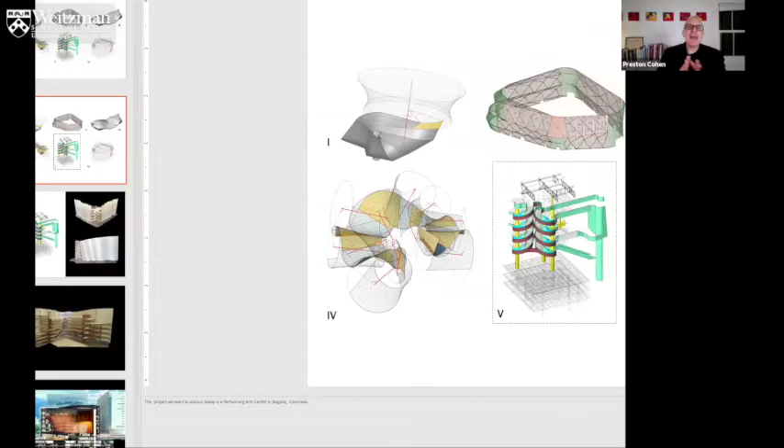The way we like to work is to problematize, as we put it, form in architecture, and in ways that will do very specific things, very specific, exciting things, we hope. Today, we're going to tell a story about hyperboloids. Now, this is part of a much larger story. Many projects have these in our office, but this is specifically geared toward this one project. As Ali, you talked about, this is the Performing Arts Center in Bogota.

We are highlighting here one element in it, which is this extraordinary stair, this double stair. And you will see that what happens with these stairs is that they enliven this building. They make it theatrical even before you enter from the piazza. One for going up, one for coming down, or they are, let's say, the ends of a curtain about to open or shut. There are many possible metaphors, which I actually think are meaningful. They resonate in a way, but it is also just pure geometry.

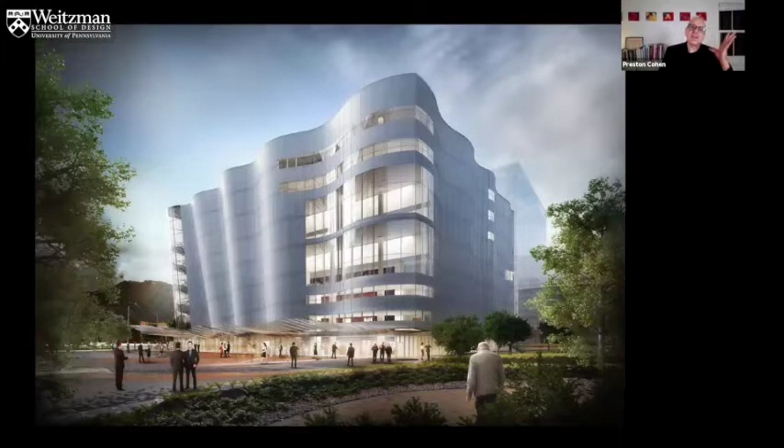If we were to look now at why we did this, we start with this big theater. It's 2,100 seats. And you will see when we show you, we also have a very large black box theater, that in this process of creating this facade, which turns out to undulate, to respond to that corner of the two cylinders, and we'll come back to this, what you will find is that these two stairs have created a sequence for dealing with a very difficult site situation.

Let me tell you about the site. Basically, we have a seriously compressed situation. It's far too small. It was incorrectly planned. It was not anticipated that there would be such a large performing center there. It's right across from this enormous development that OMA have begun, master planned. And as I said, a site too small.

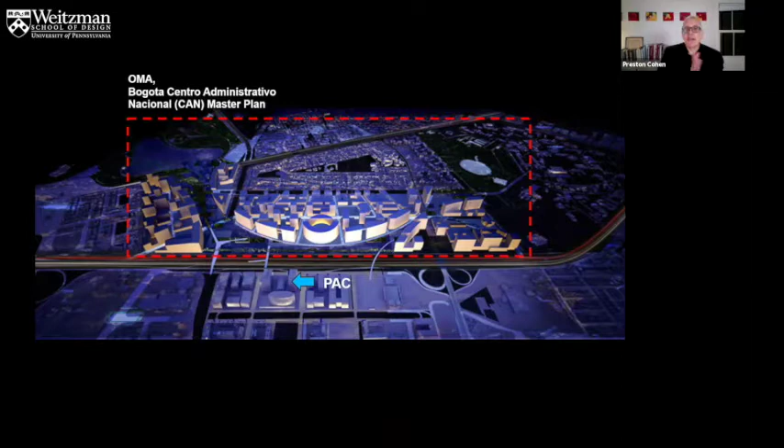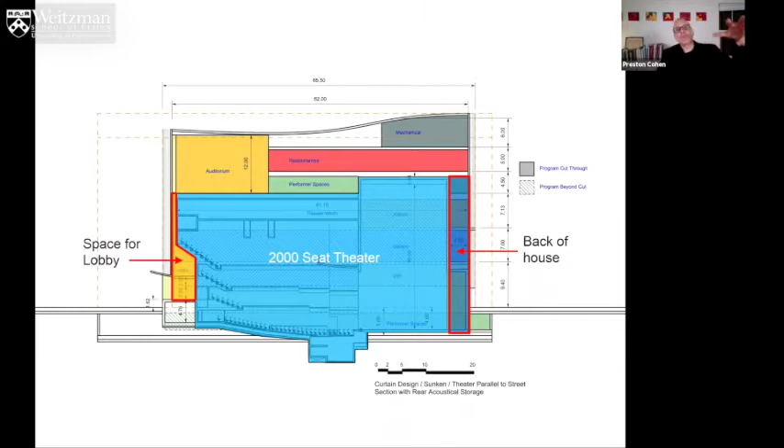So we began. We got this site, and here is this theater, but it really barely fits within the setback, as you can see. And we struggled with this for a long time with consultants; there seemed to be no way to make this work efficiently and to have a reasonable lobby. The lobby was so tight and small. So we thought, why don't we make it a ring? A lobby that's a ring all the way around the theater. This didn't go over well in terms of circulation, in terms of the congregating of crowds. Can't do it.

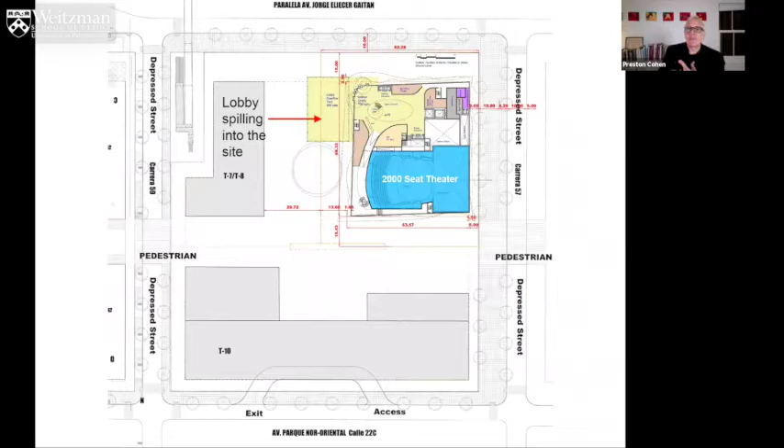Eventually, as you move through this, you will see what happens. We begin to push things up from below the theater to relieve space in the plan. And in this process, we evacuate space for a lobby on the ground level. It's very interesting because as we worked through the project, it kept lifting because more and more of the back of house had to go below the theater. And it was still trying to connect to things that are underground, which was causing a lot of this back of house to kind of violate the theater, to travel through the theater, almost toroidally, Ali, toroidal space. It was passing through and down into another space below. The back of house was for quite some time doing that.

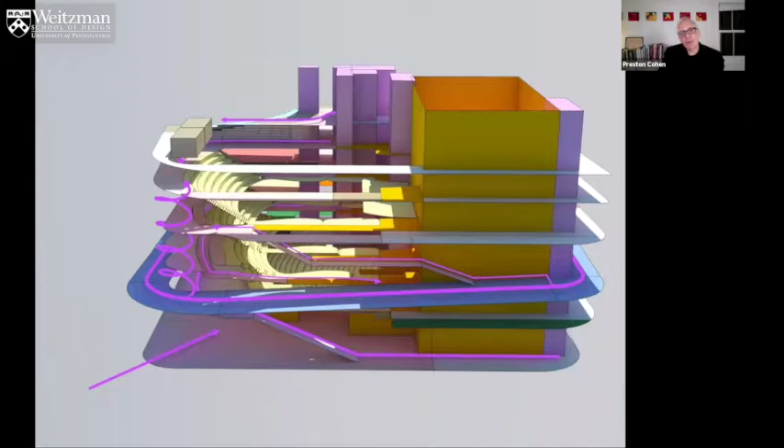Finally, we just lift the whole thing off the ground. We convinced them. It's a long process to arrive at, but eventually the theater is out of the ground entirely. We have an orchestra pit under it, so it's even lifted higher because of that. And it's really up there, and we get a huge lobby. You can see the lobby here in section in the model.

As you rise through, you are going to see that we have a very exciting arrival to the lobby on the level of the seating. And you see the two stairs in the corner there. These two have become a means to kind of create a very dramatic and exciting inward-facing sequence of passage on up into the balcony level and beyond it to these other spaces like the black box up there on the

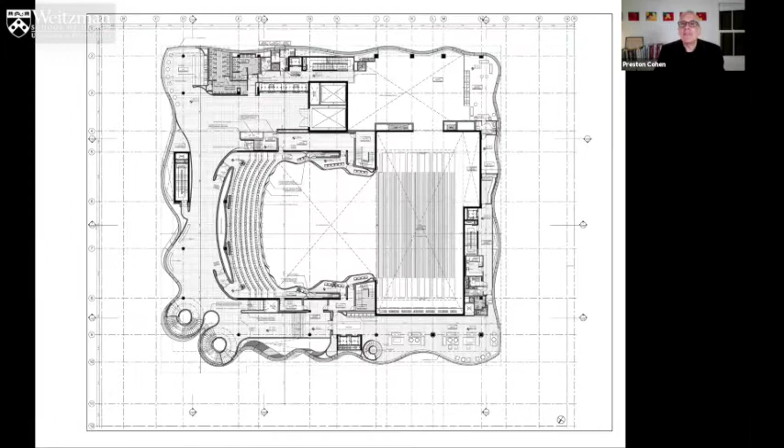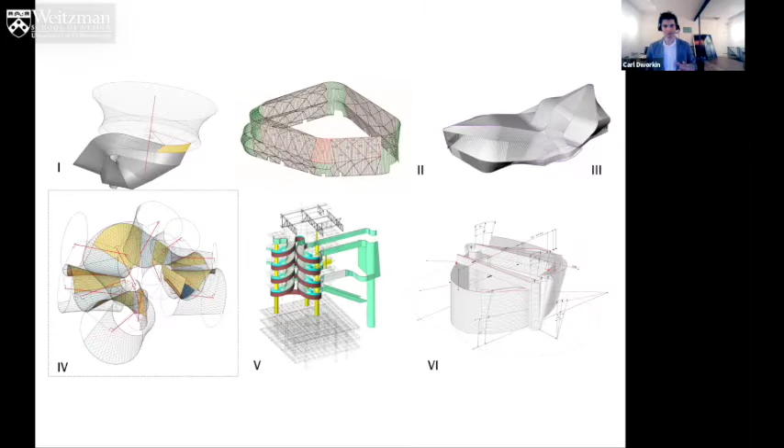Okay, so hello everyone. I want to return briefly to the notion of the 6 projects, and I'm going to start with the basic geometric construction for all of these projects in this narrative that we are working on. And this involves a sequence of hyperboloids strung together tangently, and the surfaces are trimmed to include only a portion of the full hyperboloid. So here you can see the construction sequence of each hyperboloid adding to the next one.

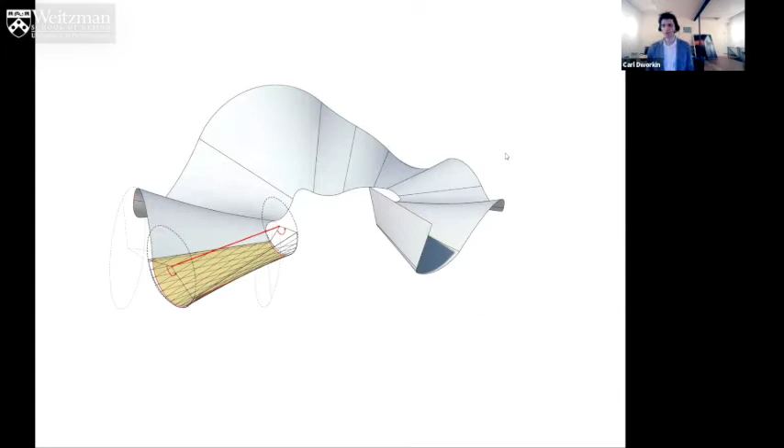And there's a lot of constraint in the way these surfaces link together. And throughout all of our projects, our goal is to produce surface continuity, but also to make manifest that constraint and tension. So to create a tense and taut object where the tension in the geometry is visible and apparent. And we're always asking ourselves whether you can see the tension that was actually within the piecewise continuous stitching of all these surfaces. So here you can see them superimposed on top of each other.

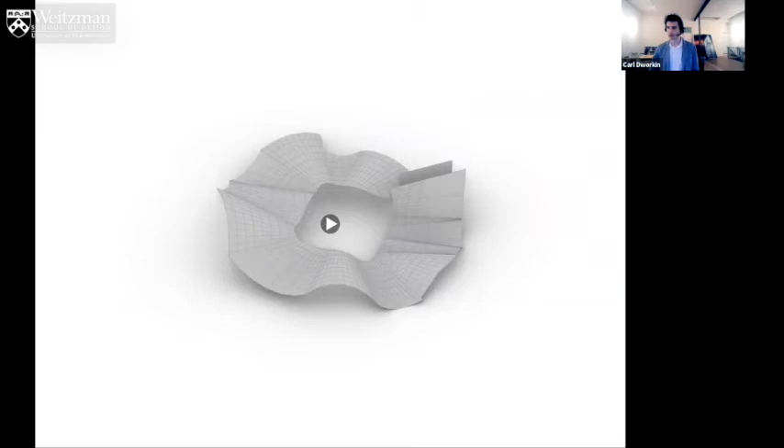So that is the underlying geometry for the facade and for this whole project, and I'm going to explain that in detail. And here in this video, you can see a property of the surface, which is called the skew angle.

Can you see that video, everyone? It's not running. That's too bad. I have to go to the next slide. Okay,

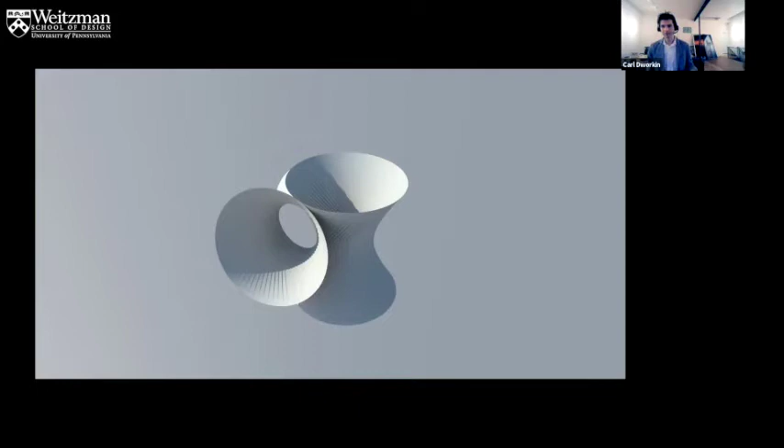And you can change the proportion of these things together. Making the proportion weird is always a good idea. Scott is never content with the straight up proportion. And you can nest multiple ones together so they can share multiple different skew angles. And you can stack them on top of each other, which produces this line there that you can see. And you can try different permutations of that.

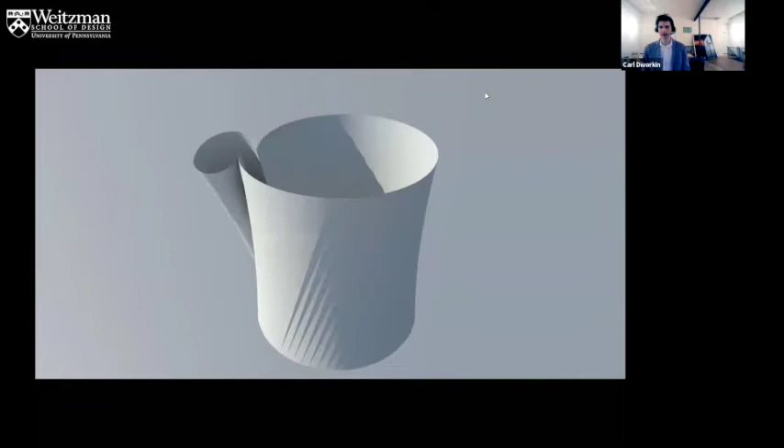So this is a common thing, this particular construction, but what people don't often realize about it is that this line of intersection can be thickened to make a space. So you can add a gap between the two hyperboloids on the line. And this is the moment of innovation for this project, because the implications of this gap are sort of profound. So here you can see various versions of the gap.

And I really hope you can see my video here. You cannot.

Anyway, this is that particular thing. And you can see that actually it's possible to elaborate that gap into an incredibly complicated involuted space. So this is sort of where we tried to go based on that innovation. But actually, we sort of stepped back from that moment and left that for a later exploration.

And we took this particular diagram where you have these two hyperboloids, and this became sort of profound for us because it allowed circulation back and forth between these two halves. And so we thought, what if we could add a stair to this? And so we became interested in putting spiraling stairs of changing radius inside of these two paired hyperboloids.

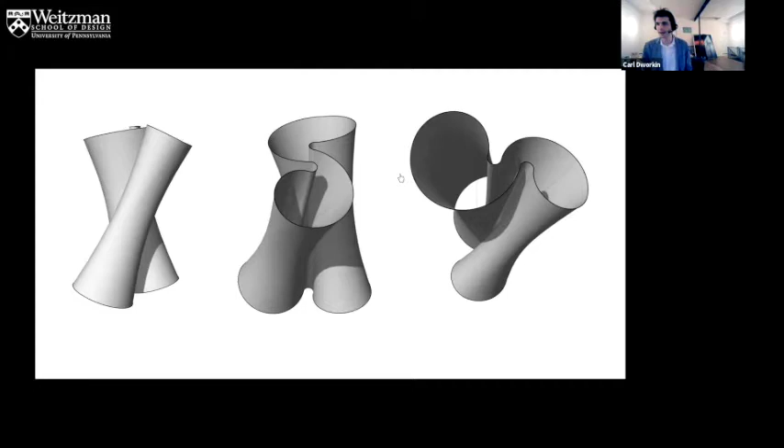So here it is back to the condition without the gap. And here we are adding stairs. You can see this is one volumetrically distinct stair clinging on to another volume that would have a stair within it. And we worked on various versions of this.

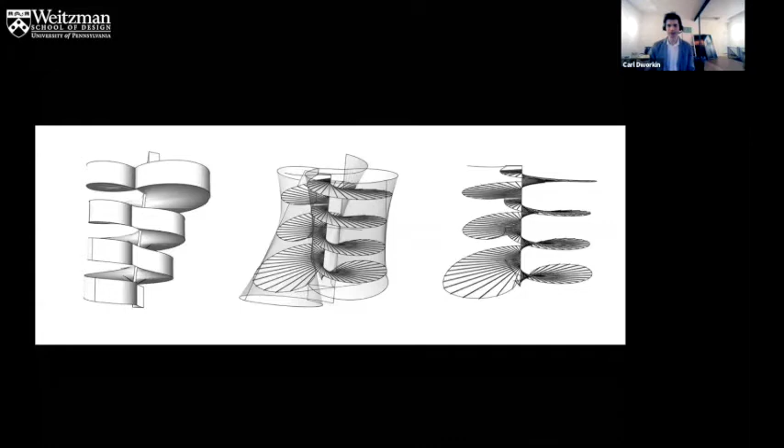And here we are beginning to add the gap back in. The gap makes possible sort of cross-contamination between the stairs. And these are the concept diagrams for this. This is a diagram of a single layer of interweaving, interconnected stairs that are nested inside of two hyperboloids. And the final diagram of that idea. So the gap leads to this.

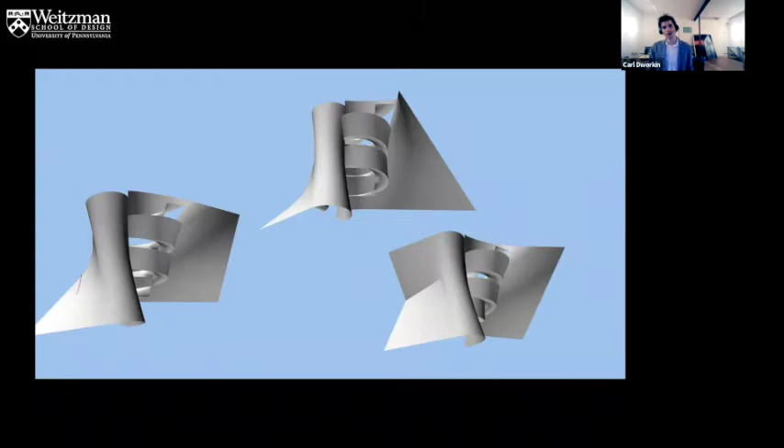And then we started again playing around with changing the proportion, which again is always wonderful. We didn't stop. There are other sort of wilder possibilities. And one of the things that Scott always pushes us on is to try some of these rather than staying on the pure diagrammatic version. And these other versions are less pure, but they're possibly more interesting. And that's something that I've always really valued.

So here's one with a surface with a stair nested inside of it. It's a fascinating direction for a project that we didn't do. Someday that one needs to get done. Yes, it does. We will do it. And here's the inside of that. Look at this one. Here's a stair clinging onto a surface, like a barnacle.

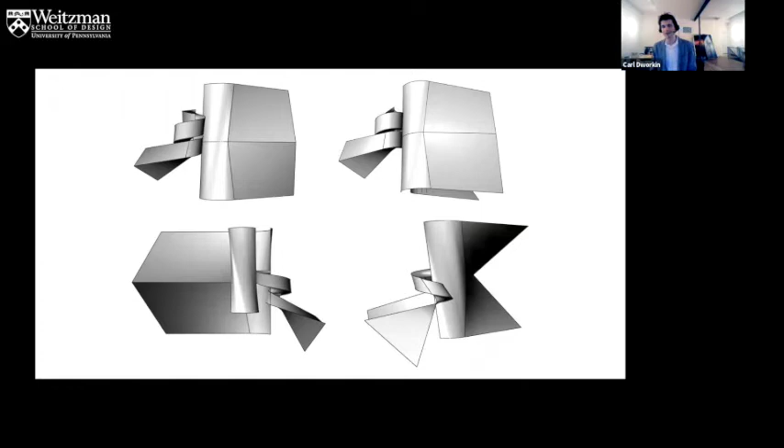And these are, again, other possibilities for projects that we didn't do based on the same underlying idea. This is a tiny stair hanging onto a surface and sort of spewing out and becoming part of the landscape. Here are two stairs wrapped around two interior hyperboloids. It's a stair attached to reeds or straws.

And each one of these nested hyperboloids has a moment of tangency with the others, along a single line. So you can imagine those relationships changing as one grows or shrinks. You can visualize them stirring around. This notion of motion and the fact that something is never stuck is something that Scott has constantly been drilling into us. So I would love to continue with this idea also, Scott. It's a really good one.

And here's one spiraling out from within a surface, becoming part of the surface, merging with it. Here's another one pushing into a surface, a stair falling out of a building, and the possibility of an inside one and an outside one in this nested, implicated dynamic. It's another one. Let me just say one thing about the stair, Carl.

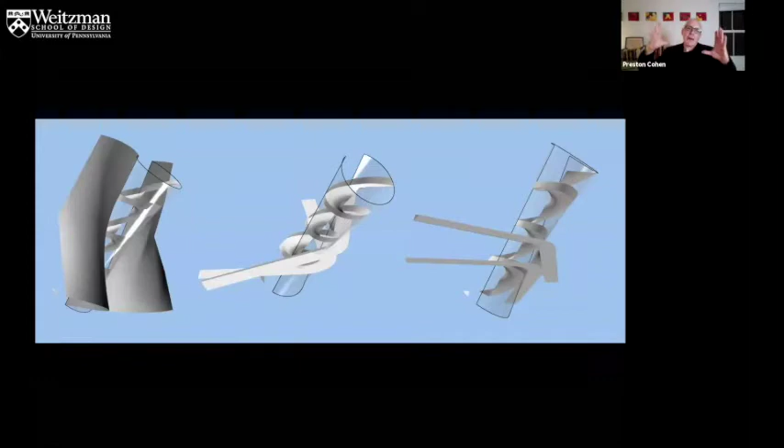Go for it. The goal from the beginning was to deal with this problem of the building that's too full of the theater. The theater was absolutely filling it, and there was a very, very limited area for a lobby adjacent to it. It would have to be the second lobby, not the one below the theater. So when you move up into the building to actually prepare to enter the theater itself, this becomes one of the most important aspects of the whole experience. The Stair of Garnier in Paris is absolutely profoundly the most important part of the theater. So this stair is the realization of an effort to make an extraordinary experience moving up through it.

Now, why is it in this contorted form? It is relieved toward the bottom, owing to the way the theater operates in section, and so it's tightening as it moves up. But we also wanted to have people experience, while moving in it, the fact that sectionally the building is, let's say, not simply an extrusion. Theaters don't extrude as other normal buildings do. As you know, they're very sculpted forms.

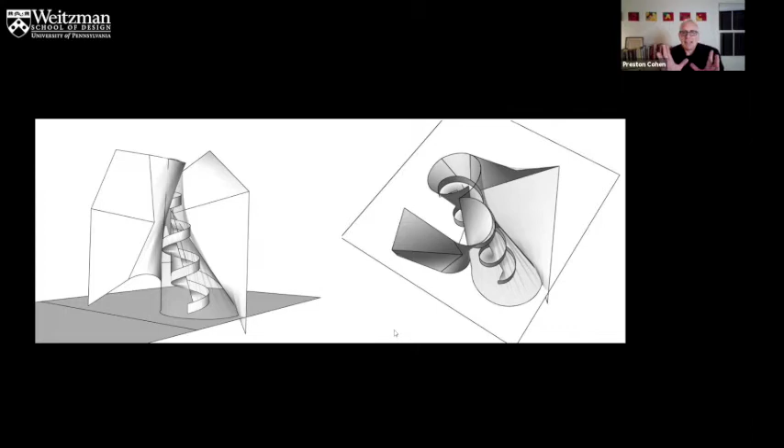And this facade is both trying to address itself to the plaza, present this drama of the stair, and have the stair be experienced inside in such a way that you're aware of the movement of the form of the building. Now, the idea of it being a tight duality, two things so tightly bound together, was somehow the beginning and the end of the story.

The curtain that wraps around the whole building and shuts or opens here, this is the point of commencement and conclusion to the whole building. That ending, that beginning, the stair up, the stair back down. This duality seemed absolutely essential to us. So it's all of those things. A duality, an expression of all these pressures. You see what I'm trying to say, and we want to do it in a very, very geometrically disciplined way to express all of that. It's very hard to make a stair happen in these hyperboloids this way.

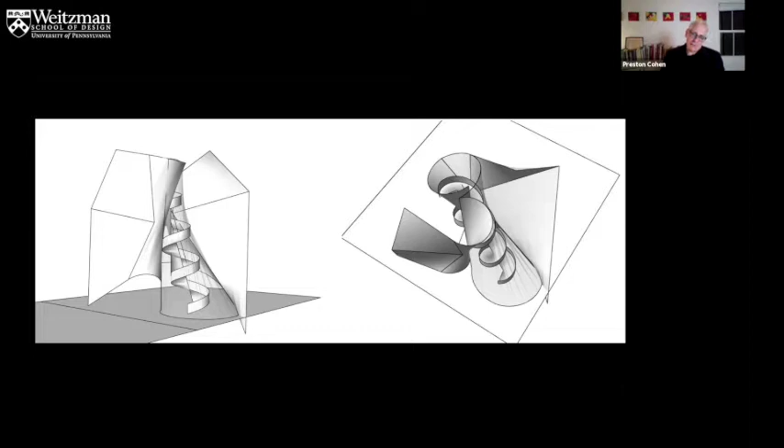Yeah, that helps to explain why, because otherwise we're just talking about tilted stairs. How do we get there? Explain what our main motive was, what we were desirous of. Why do we do it at all? Yeah, what we were desirous of.

And in each project, there are these kinds of desires, these kinds of needs for certain things to happen formally, we feel. So we also had been exploring tilted stairs in some of our other projects, which you can see here. So we had this sort of trajectory we were working on. And the idea of a tilted stair is actually kind of hard to realize, as Scott was saying, because in order to be code, you can't have a migrating spiral stair with changing radiuses.

Each segment of the stair has to be a true spiral for its height, like a series of cylinders nested that shift within a larger shape. And I wish you could see my animation because it makes it clear, but each one of these cylinders will shift off of each other, and the error, the flex between the spiral, is taken up in the landing.

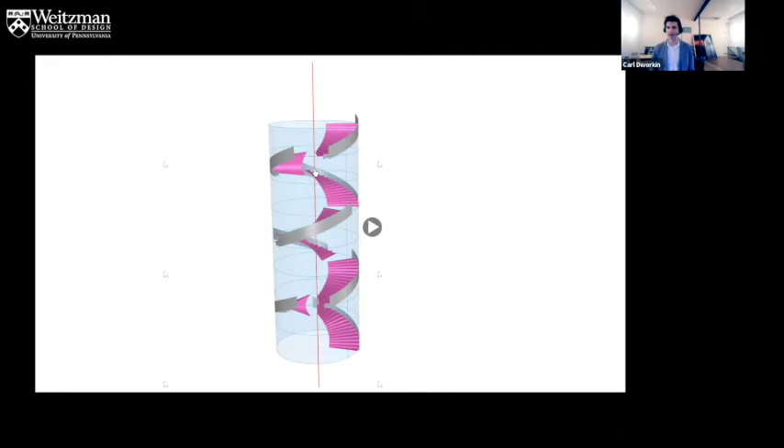And then what we do is we add a smoothing step where these railings tie together the buffer. And you can see we have extra space in the stair so that the path that you walk on is a circle. And then when you get to the landing, there's enough space for you to shift. And overall, they produce something tilted. So here's the diagram of that shifting sequence of stairs.

So yeah, the stair is broken into these pieces in order to conform; it can't smoothly occupy this tilted cylinder.

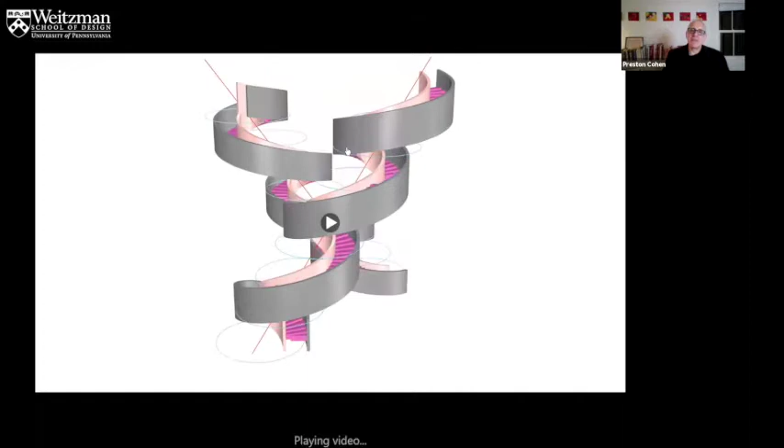Carl, you haven't explained that we ended up, when deploying this, in 2 tilted cylinders. Yes, I have not. That comes later in the narrative. Wait.

We're talking about the stair. So this is the final stair in the project. And here you can see the completed stair in the model. We have to start somewhere. So we're not showing you the facade, but we'll get there. This diagram, actually, this column is too big. It's kind of fascinating. This column that was holding up the stair is filling up the whole stair. So that had to become a super post-tension column, which you can see here. They had to make it skinny.

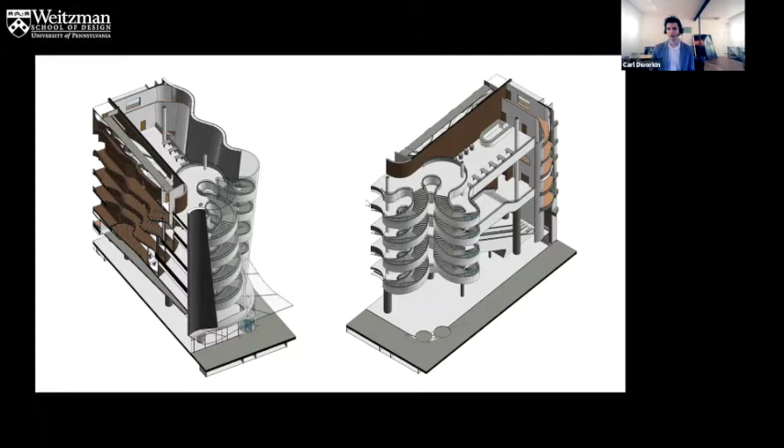So you're now looking at the Revit model of the stairs, the final Revit model of the piece of the stair. This is all happening concurrently with the facade development that we will get back to. That's the Revit model. So we have this glass guardrail. We have these handrails that are offset. And these are the plans of the stair migrating in space.

And one other thing to note, Scott was talking about how these stairs are part of the ceremonial sequence that results from the fact that we have a lobby that is below the theater. So everyone has to move on them. So they're enormous. And actually this stair is 10 meters in diameter, which is the size of the room that you can currently see me in. This is our office. And that's the size of the stair. There's also a basement, but the stair isn't in the basement.

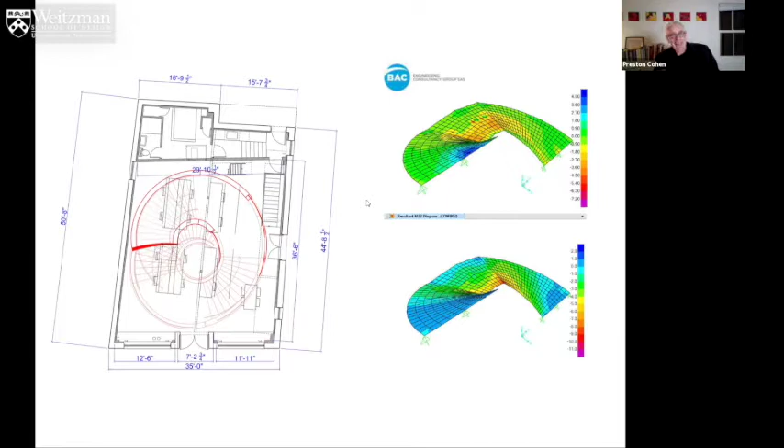We've used our office many times to measure and test light. That skylight there is how we figured out the Michigan skylights. And now the size of this. We had no idea how big this was until we... Oh no, it's enormous.

And these on the right-hand side are the stress diagrams for that stair. So this giant thing needs to be structured. And one thing that Scott never allows is putting stairs on hanging cords. It's like putting a stair on crutches. And so this is the model we were sending back and forth to the structural engineer. And the railing is a giant beam operating with the thickness of the stair to hold it up. It's a giant curving beam.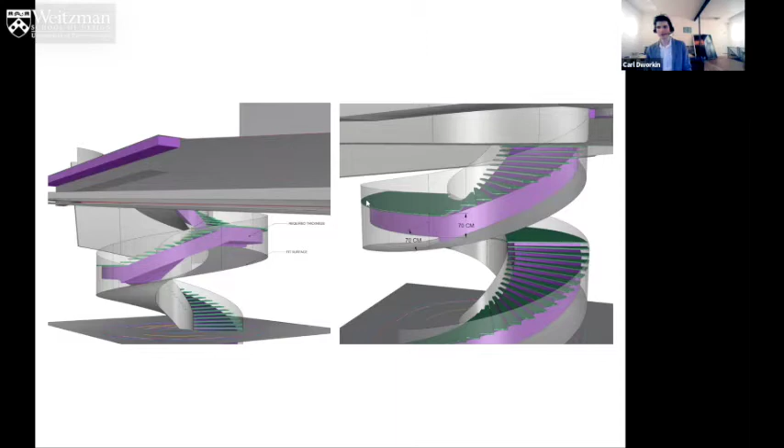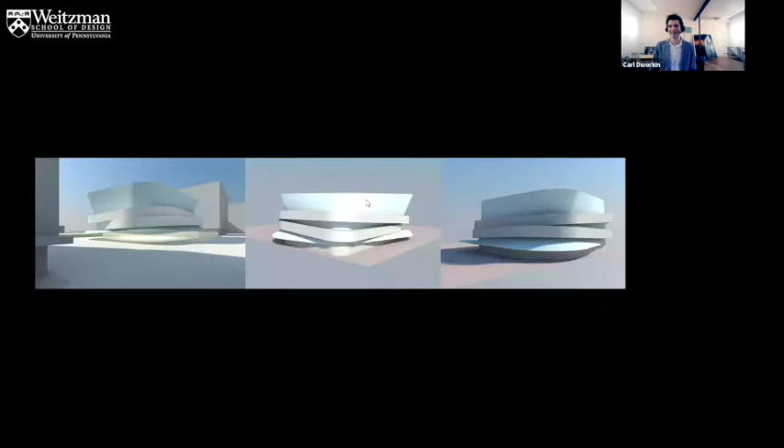All right, so now we're going to go back to the facades. Again, you remember that construction of hyperboloids. This is the basic tangency condition. However, we were not interested in this pure version of one surface being attached to the other. We tried many other less pure options, as I noted before. So we started attaching hyperboloids that would hold these stairs to the building with belts. That's our first idea. And then we made more belts with circulation inside of them. They could be galleries or lobbies.

Remember those sections Scott showed at the beginning with the lifted belt? So these things are happening concurrently, right? 2 belts squeezing the form out, making a canopy. This belt is a strap pressing into the facade. So something interesting to note is you can see this belt is not fully articulated. It becomes tangent to the surface. And that also is a property of hyperboloids.

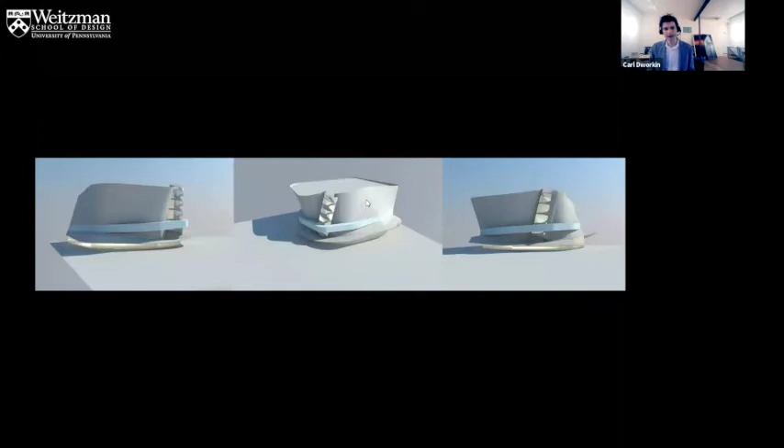They can be merged or split by virtue of splitting the isocurves. And that process looks like this. You can have a single hyperboloid that splits. So this notion of the belt merging with the surface can be traced back to the geometry. And you can make objects that look like that by the splitting. So here you can see the behavior deployed again with the stair. This stair has a negative and a positive relationship to the facade.

And here again, the stair falling out and the canopy spewing out into the lobby, into the site. And then we tried these super connectivity diagrams. So these are spheres, hyperboloids, and hypars all interconnected into these complicated objects. They're all different. All these different types of surfaces can have tangencies with each other, and they can hold together and start to break apart. You can see there's these spheres sort of caught within the surface of the project. And the one on the right is the first one where it sort of starts to appear like a curtain.

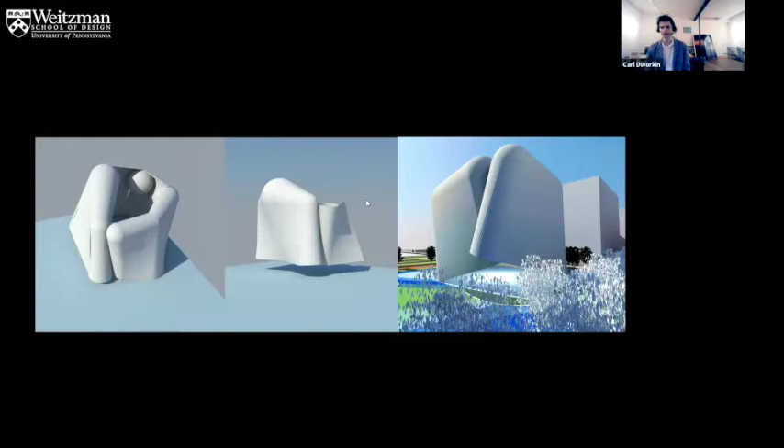And then the super connectivity diagram led to this notion of the anamorph. This is a particular one that we wanted to do. It's another project we haven't done yet that we would like to do. And this is a video of it, which you won't be able to see, but maybe I can click through. You can see the anamorph distorting in this super connectivity diagram of the spheres and hyperboloids sort of inverting.

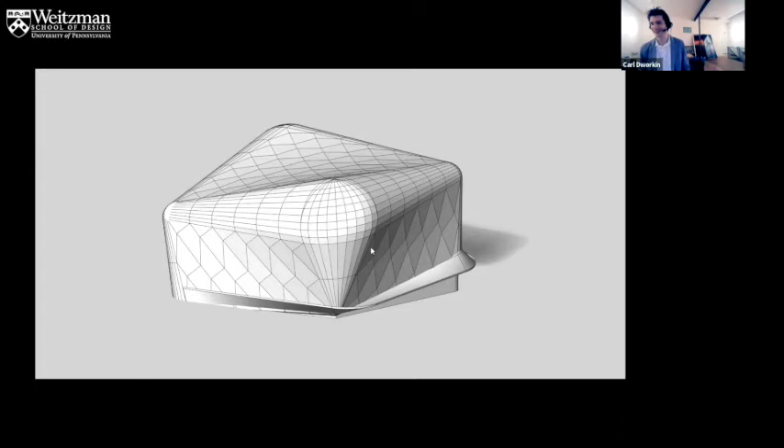And one thing about it that's fascinating is you can distort it, you can twist it, you can shear it, you can scale it, and it retains its property, its ability to be panelized into flat surfaces. So it can become this incredibly distorted, twisted object while still maintaining its intrinsic properties. You know, so wonderful. I was like, we did it, Scott. And he was like, we got more ideas. So everything is always churning and going forward.

So we tried this one and I was like, you can't make me do this. It's ridiculous. It looks terrible, humorous, but don't laugh because this is the one that becomes the final one. So it's getting a little more tame. It's got this nose. It looks like a rhino. Getting less bizarre. Oh, you're making it sound like one thing led to another. This is not exactly what happened.

And we had another problem, everybody. There were people breathing down our necks and not liking a lot of this. So let's also remind everyone that we're not the only ones making these decisions about which direction we should go in. That's right. We're like, should we show this? They like certain things more than others. Well, and that may not be what we would have done.

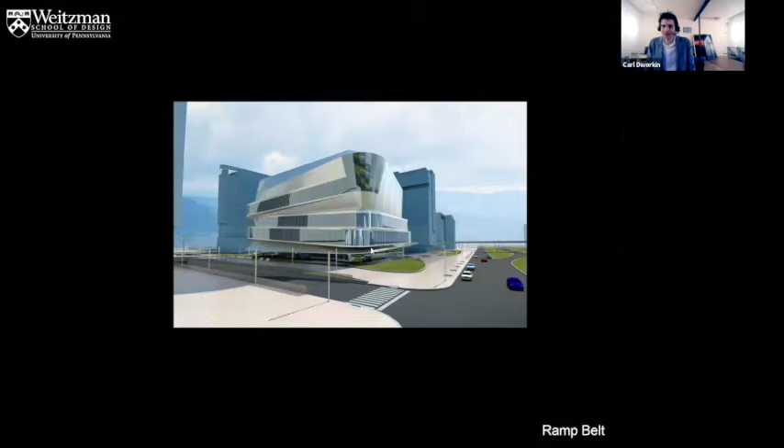That's right. So we ended up with 3 that we thought we could accept, and we presented those 3 to the client. So those 3 are the ramp belt, the anamorph, and the curtain. Of course, there's that. And we let the client choose. So what did they choose? They chose the curtain, which at this point, now our goal becomes to make this buildable.

So in order to do that, we have to build it affordably, which means we have to get the number of panels of the facade down to a small number that can be mass produced. And we have to interrogate whether those panels can be curved or whether they need to be flat. But the problem is we ran out of time, as Scott was indicating on this scheme, and this is the only one of all of them that is not panelizable. It's just a loft, a screwy loft of 2 surfaces together, and we said we'll figure it out later.

So we have this totally messy thing. Nothing is flat. Nothing is repeated. Every panel is unique. Every panel is doubly curved. You know, but this is what the client wanted. So that's what it's going to look like. Never should have shown him this. But he wasn't liking the other things. We became desperate. Right. Then we turned the building around, you know. Scott is always questioning things. Now the building's facing the other way.

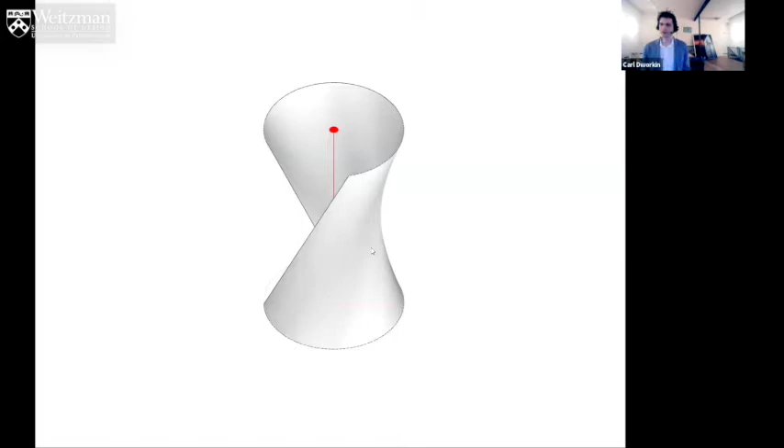So I want to tell you a little bit for your information about panelizing hyperboloids. So this is the geometric part of this talk. So you can panelize a hyperboloid into flat panels with any what's called conjugate curve network. So in the case of hyperboloids, the conjugate curve network we usually use is this one with mirrored ruling lines. So that's a flat panel in the middle. And you can proliferate panels around.

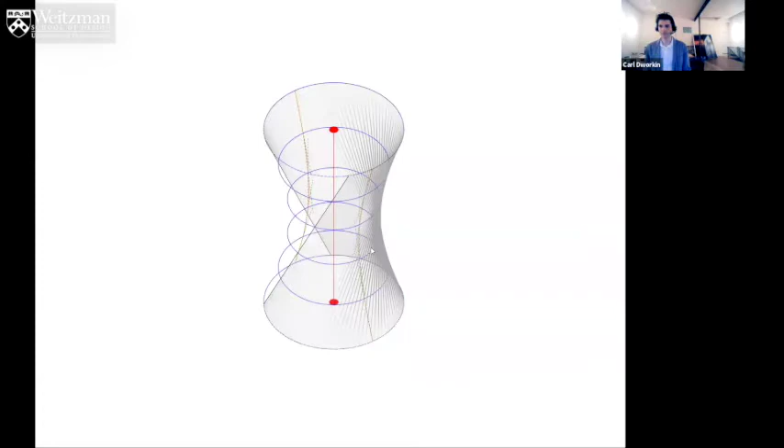It should be noted that when you have these partially trimmed surfaces, it becomes difficult to get the panels to end in the right places, and that can have a problematic effect. You can try different grains of fineness, different scales of panelization, which we always do. Another thing that is beautiful to point out is that you can panelize with cones, like that. Those are cones that intersect, which is sort of beautiful, honestly. It's kind of wonderful. Just something to be aware of.

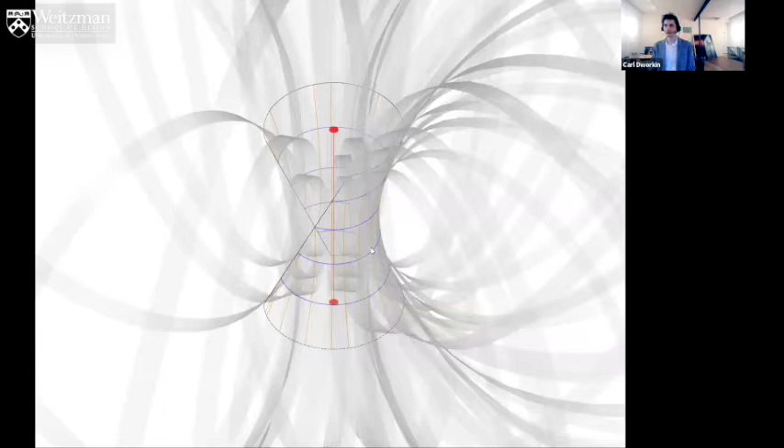And another fascinating thing is that you can panelize along the other direction, the other side of the conjugate curve network, with cylinders. So those are segments of enormous cylinders, and you can intersect them, and that produces a panelization. And you know, as those approach infinity, it returns to the original hyperboloid. So that is how panelization works.

Sometimes, though, we trim these asymmetrically. So the orange ones here are symmetrical hyperboloids, trimmed with the saddle in the middle, the skinny part. And they have less panels because they have mirrored identical panels around the bisecting segment. And asymmetrical hyperboloids would all have unique panels. So the imperative to reduce the number of panels also depends on whether or not we use symmetrical hyperboloids.

And one of the bizarre things about this project is that we have this condition where we have to go from a purely straight vertical plumb line to these hyperboloid cylinder things that hold the stairs, which is kind of hard to do. And so the first thing we did, just in analog, was to produce a version that is composed out of hyperboloids. So we proved to ourselves that we could do it. And this would allow us to panelize it into flat planes, as I just described.

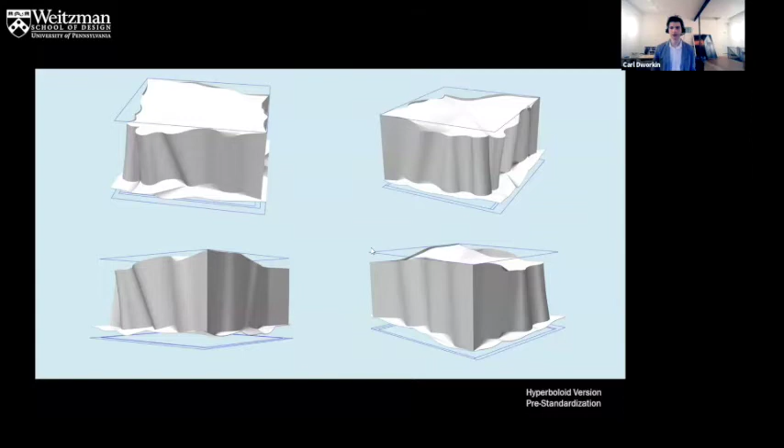And the next step is to reduce the number of panels. And we use a number of different techniques to accomplish that. So usually we use standard angle increments, and we use repeating patterns of hyperboloids. The goal is to produce sequences that appear non-standard but actually are. And then we use those standardization techniques to make a version of the facade. So this version of the facade is purely repetitive.

And you can see the isocurves. And you can see we have one unique hyperboloid for the stair, one asymmetrical hyperboloid that accomplishes the realignment, and then a series of identical ones that proliferate to the end. And we tried different scales of panelization.

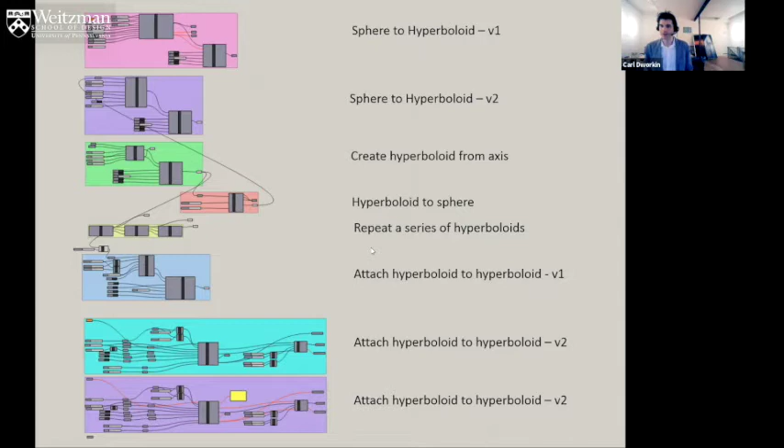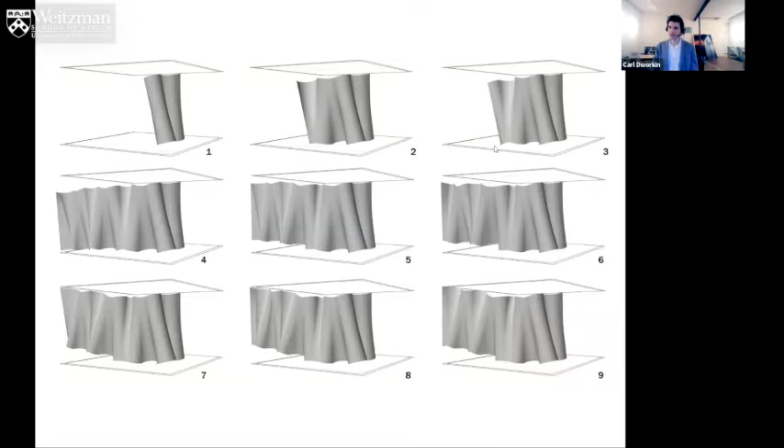The next step is to make this flexible so we can adapt it to different conditions. So we generate all these scripts for connecting the different types of hyperboloids to each other. And when you put those together into networks, they generate these kind of complicated diagrams. So each one of these is a single set of surfaces into a global surface. And here you can see the construction of a surface as a series of scripts where we are adjusting the angle. So that looks like this.

And essentially, the only way to do this is you take a guess. You get as close as you can manually by adjusting the variables. And then you run an optimization algorithm in Galapagos to find the final answer and lock it into place where it's purely vertical. And the reason you have to do that is that if you just run the optimization algorithm on all these variables to begin with, it'll think forever and never get close. But if you're very close and you can set the narrow range, you can find the perfect solution.

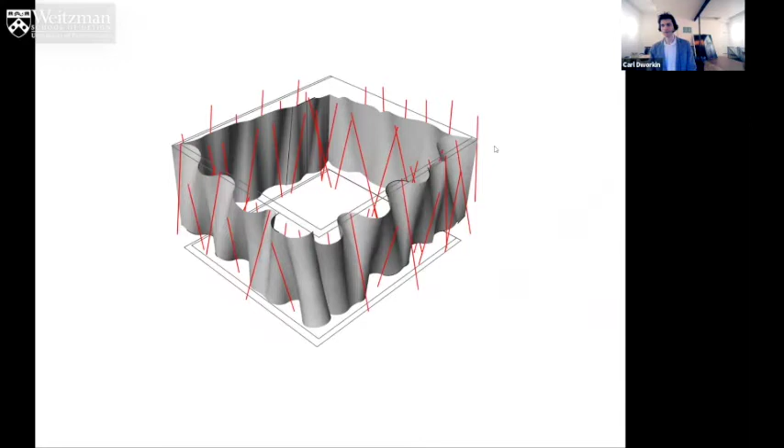So this is the first standardized facade made of pure repetition. And these are all the axes of the hyperboloids. And that version has 125 unique parts. And that's not the number of hyperboloids, that's the number of pieces. So individual panels that are mass produced and repeated to construct a facade.

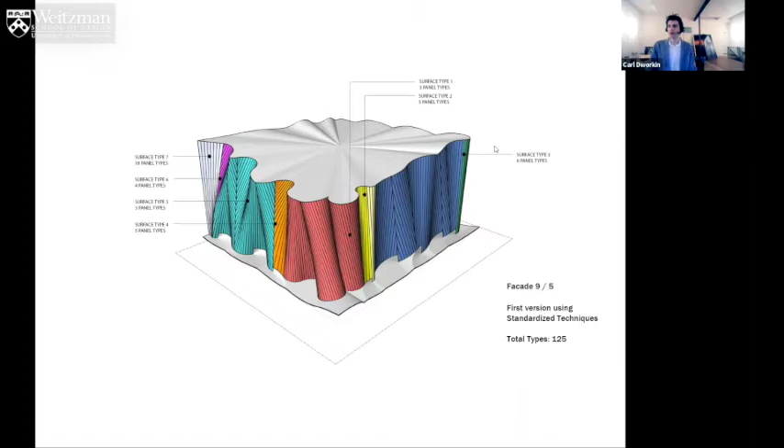Those are the different surface types. And we can count because we know the approximate size of a panel, which is material dependent. And we know how many symmetrical and asymmetrical ones we have. Those are the asymmetrical ones.

So there's another impulse acting on the facade, which is the fact that this project has a huge amount of mechanical. And the reason for that is that theaters need to be very quiet. And in order to move a lot of air, you either need huge ducts so the air can move slowly, or you need to move air quickly, which is noisy. And all of these ducts have to be on dampers and isolated. So actually we are using the ins and outs of the facade to hide and hold the ducts so that you don't see them when you're on the interior.

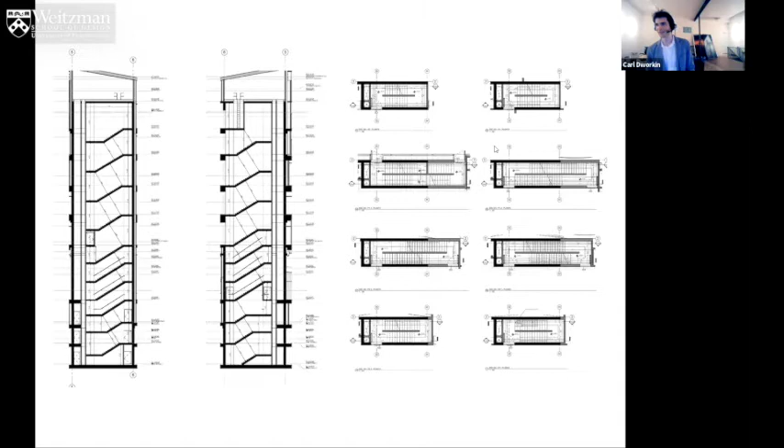So the facade, you can see here this version isn't working. The facade needs these vertical columns nested within it to house the ductwork. And it also needs to house the stairs because the stairs need to be on the perimeter of the project so that people can use them as egress. And in Colombia, you can have scissor stairs to code there, which is wonderful. We just did that because we like scissor stairs and because a lot of people need to exit the building.

So this is the facade in a state where it does not work. But the scripts that we have allow us to modulate this into various conditions with 4 variables on each hyperboloid. So the shear angle or angle of twist leads to the degree of twistiness of the surface. At low shear angle, they're almost cylinders.

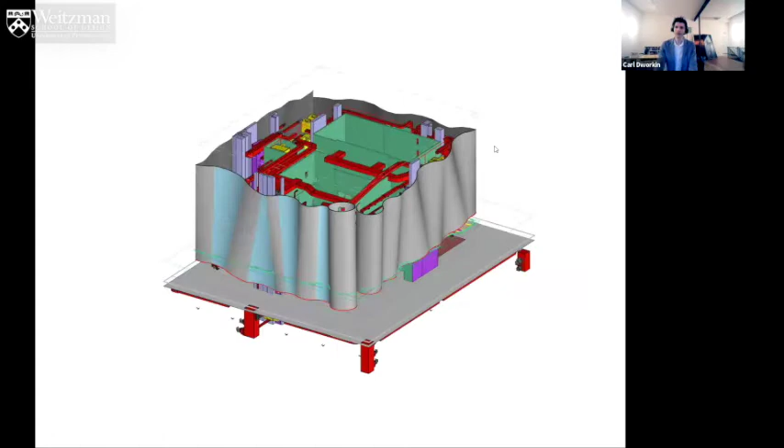Also the size or the radius of the hyperboloid is another variable. And the amount of exposure of the hyperboloid is another variable. As well as whether the isocurves are convergent or parallel. And we can use that to fit the mechanical, as you can see in this version. Again, this is a video of the optimization algorithm running.

So back to this. And then we actually changed the hyperboloids that hold the stairs out for cylinders. And the reason we did this is because we argued about it, Scott and I, because I wanted them to be hyperboloids, but then I became convinced he was right, that they need to be pure, cylinders, clear. They need to be all glass and true curvature.

And you cannot have doubly curved glass affordably because there's only a few manufacturers in the world that can do doubly curved glass, and you have to send it across an ocean. So typical curving of glass is performed by pressing the glass into rollers during the tempering process. And it's actually not all that complicated. And curved cylindrical glass is possible and affordable. So we replaced the cylinders with cylindrical glass.

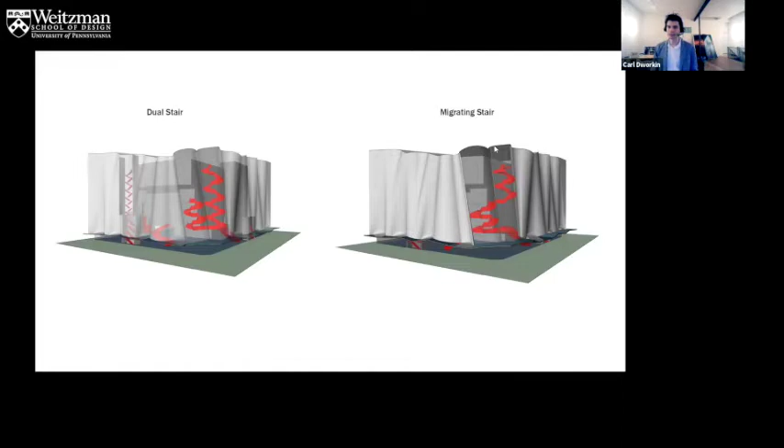And that controls how many radiuses, the size of the radiuses and the size of the panels that you can have. And at this point, we are still discussing whether we would have one stair or two stairs, whether we would have a migrating stair and testing it. So all that stuff at the beginning that was about rationalizing the particular stair, we weren't there yet. We were trying different versions of stairs and testing their effects on the outside, testing their effects on the inside.

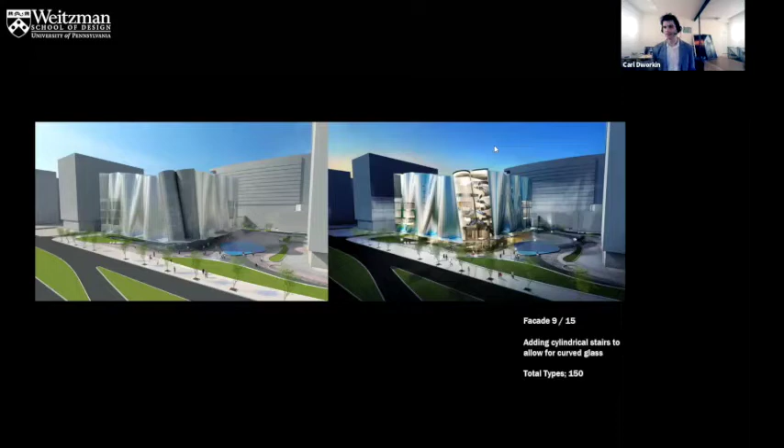And eventually, we decided on these two equal stairs that Scott described to you philosophically from the beginning. One goes up, one goes down, they're ceremonial. So this version with the cylindrical clear stairs had 150 types of panels, so a bit more. And that's an image of that. So returning to the development of the facade, this version with asymmetrical stairs, 110 types.

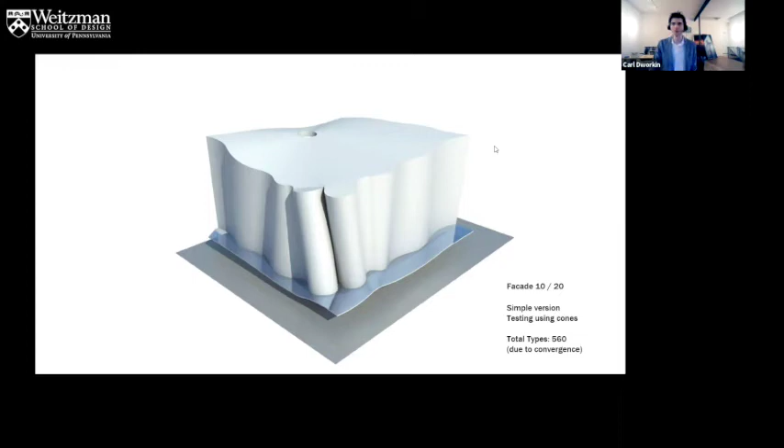We tried one with cones, and that had 560 types due to the convergence. So it's interesting that the double curvature of the hyperboloids is actually more efficient, which is very satisfying. Still out of control. Too many. And then we had this awful moment where the client said it looks too unstable.

And so we did this thing where we aligned the axis between the two hyperboloids along the 45-degree angle. And actually, we ended up being okay with this because it's only at this moment that it preserves the stability and it actually locks the project into place. And then in other moments, it's unstable. Carl, let me just tell them something about that. Yes, please.

Major crisis. It was. He looked at the model and he said he felt vertigo, that he would be afraid to be in the stair that tilts away from the building. And I was, oh my God, this was terrible. Yes, I forgot that. That's true. It was a very traumatic moment.

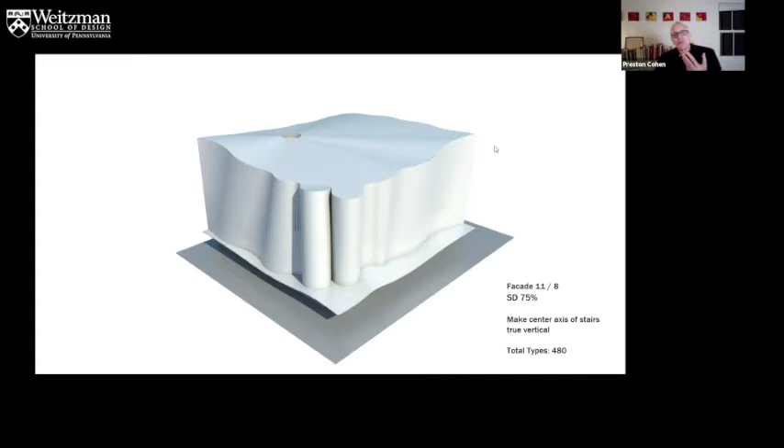We managed to convince him by working it out so convincingly with the engineer and breaking it into segments, making clear that the segments, each of them is plumb unto itself, and that they are staggering outward. That's why we built that model, right? The glowy model at the beginning. He decided to stop worrying about it. It's just a matter of one having to accept something. But there was a period in which he was not so comfortable. Yeah, it's true. It's very interesting.

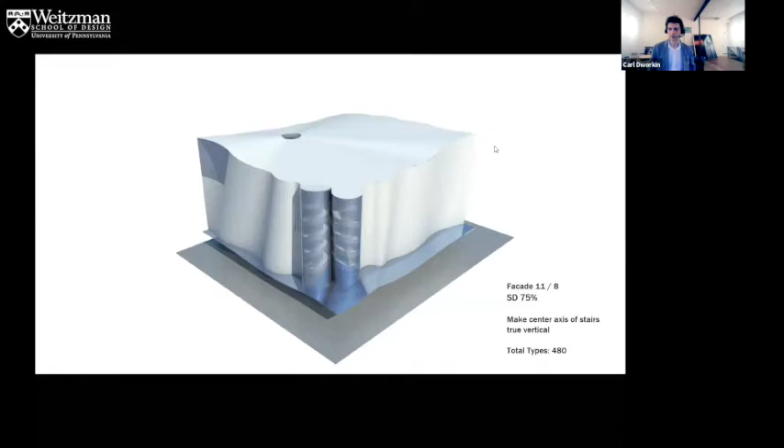This one had 480 panels, so we're kind of getting out of the range of buildability here. And we created multiple versions with different degrees of twist. And the client selected this one. Actually, this one, it was a compromise amount of twist. And we got down to 84 types of panels, and here you can see the types. Those are the 84 different identical panels.

And those are the hyperboloids. And so at this point, we actually began to wonder whether or not the twist was having enough visual impact. And we evaluated this a lot, because you can see each one is rather cylindrical at this point. And we decided that overall, the twist was still apparent. And we built this model. And you can see it. However, that was the end of SD. It was determined that 84 types was too much.

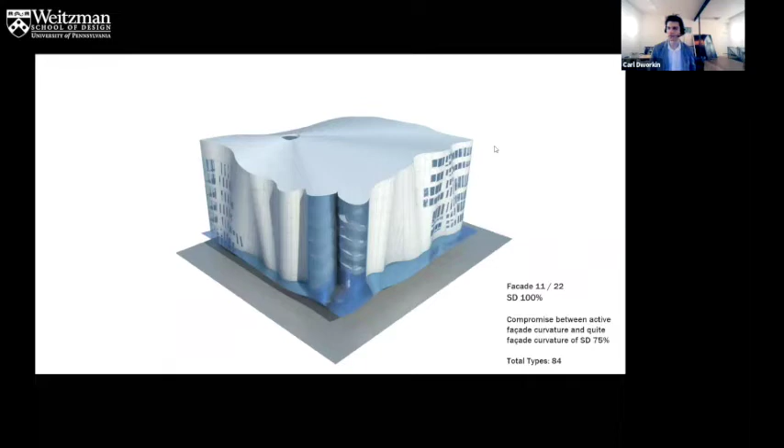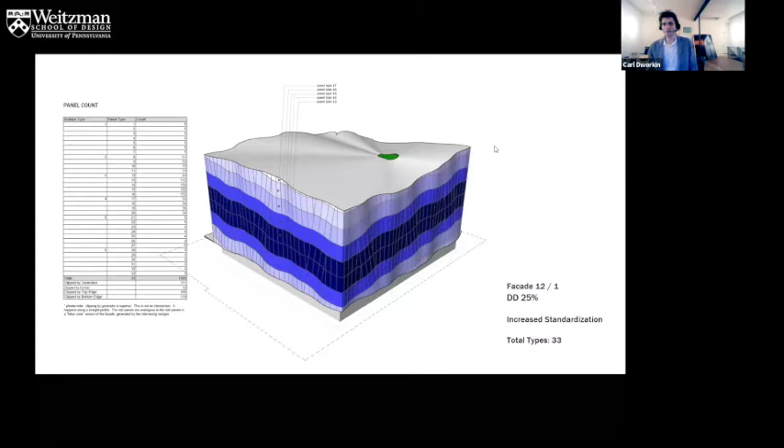Yeah, there you can see the different hyperboloids. And actually, this diagram shows the notion of clipping. So some materials allow you to clip panels after they're cast, and it depends on the material whether or not that's affordable. So, at this point, it really is important that we start to talk a little bit about materials.

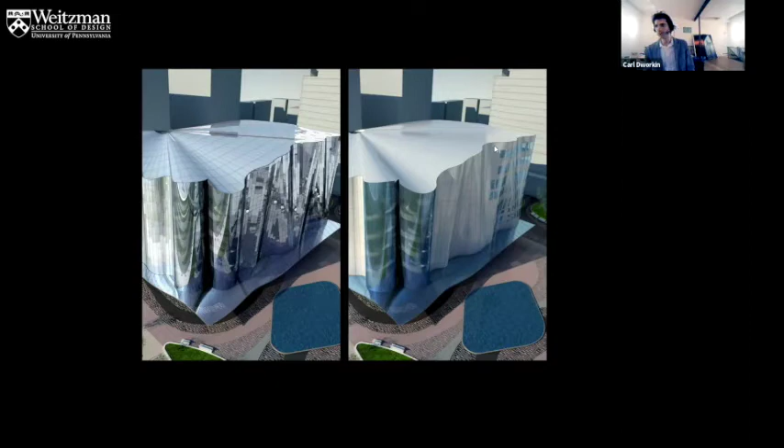And we were considering 5 different materials at this point. So curved glass, flat panelized glass, doubly curved glass reinforced concrete, or GFRC, Corian, which is this weird material that's like stone, and metal, which is the low cost option. And each of those segments was produced as a mock-up. So these are the segments we created for the mock-up. Some are panelized into flat planes, some are developable surfaces, and some are doubly curved, depending on the material.

And here you can see the glass reinforced concrete being produced. GFRC can be doubly curved without significant additional cost if there are a limited number of types, because it means a limited number of molds. There it is being produced. That's the Corian, incredibly white. The client cared a lot about the whiteness. And here you can see the mock-ups being erected on the site, assembled, brought in with cranes.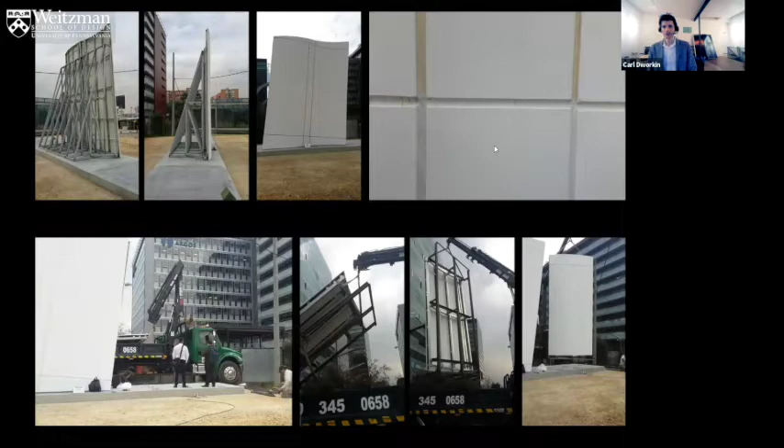And so a word about this: this is what's called a unitized facade system. This is a diagram by Arup. Basically a unitized facade system is a series of pieces that are built off-site and hoisted and anchored into place, as opposed to a stick-built system like a curtain wall, which is usually erected on-site. And these units are typically secured, as you can see in this diagram, at the floor plates. This is the structure for this project. So typically the unitized panels would be secured to those floor plates.

However, in our case, we have 2 conditions that don't allow that. First, we have these vertical atriums because the lobby is to be passively ventilated. This was an important part for meeting our environmental performance goals, and also for limiting noise, so we don't need additional ductwork for the lobby. And also, we have migrating horizontal joints. They run on diagonals. So in both of those places, the unitized system cannot be linked to the floor plates, and we need this additional substructure, which you can see in this diagram.

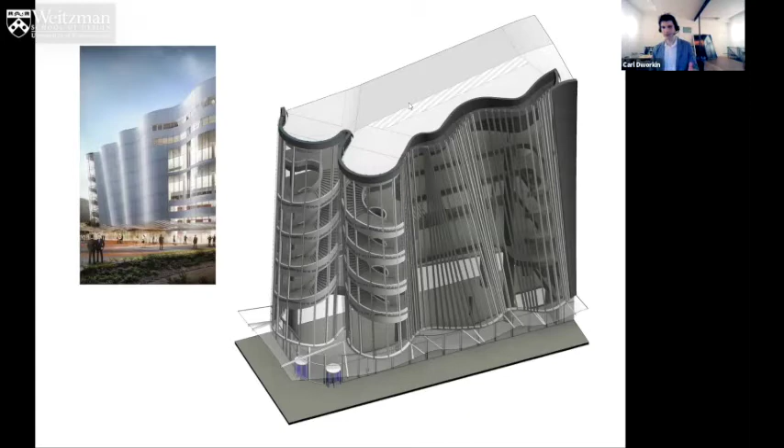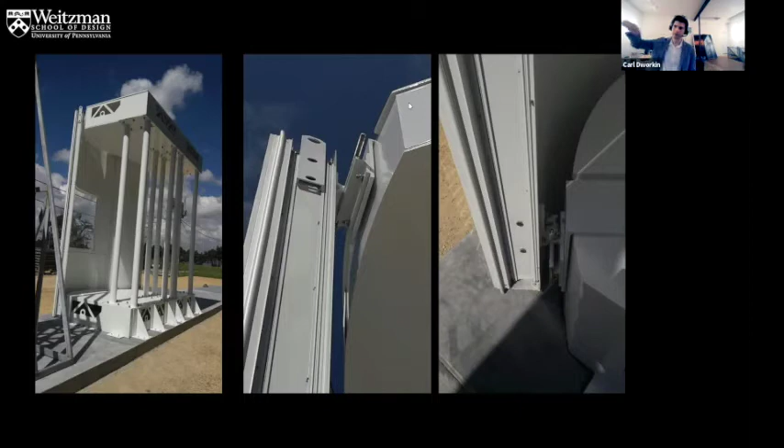Also, this is a seismically active zone, so the joints have to have movement in 3 dimensions between each of the panels. And there's this complicated joint, which allows movement in all 3 axes. And each of the different mock-ups is built by a different manufacturer. So some of them actually developed custom details for the project, and not all of the manufacturers were able to account for the movement of the facade while preserving these migrating diagonal horizontals.

Here you can see the glass and the concrete mock-up against each other. The interesting thing, though, is that the glass was a very innovative system. The manufacturer was developing a sandwich of 3 types of glass, 2 transparent layers with an opaque layer in between. And the opaque layer is cut to allow for transparency. So this made the transparency independent of any structure or joint or mullion between the panels, which allows us to have windows without mullions like that. It's too beautiful to pass up. And so we decided that we had to go with all glass.

And that, of course, means we can't build it out of hyperboloids. So all that work for nothing. We have to build it out of cylinders now. I was right from the start. Yes. Cylinders were the answer from the get-go. The whole building became cylinders.

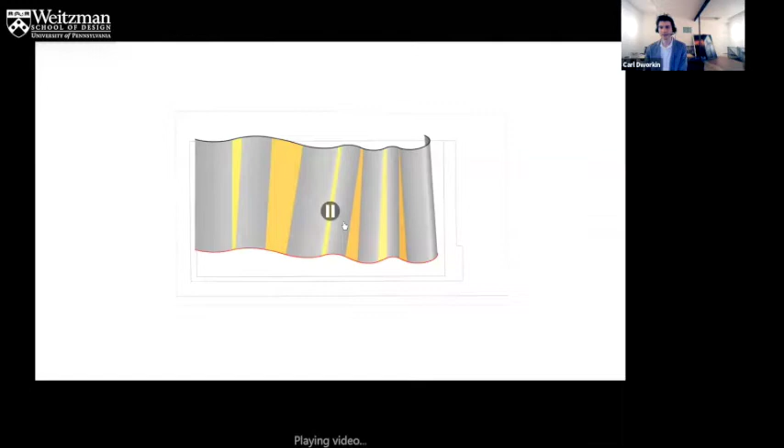And so what we did actually is we analyzed, you can see in these videos, the behavior of the facade as hyperboloids, and we tried to mimic that behavior in plan and section with a setup of cylinders, a specific way of linking cylinders together around 2 planes that are mirrored around a bisector. And that actually creates an experience that is very similar to the experience of the twist. You can see that here, and it has the same types of controls that the hyperboloid did: radius, bisecting angle, and

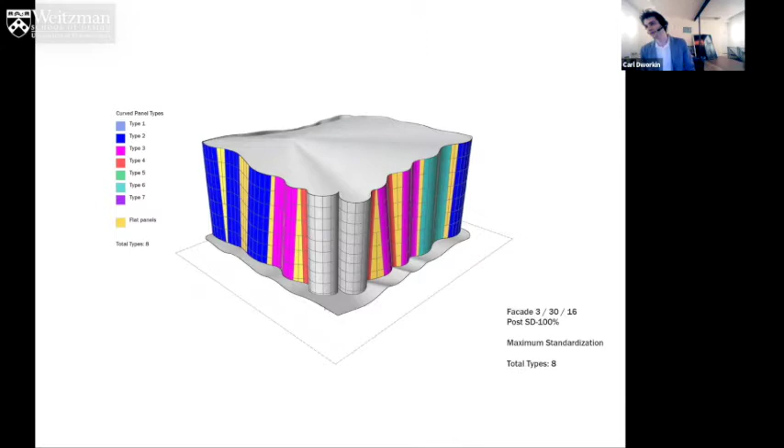we set those up with a whole new set of Grasshopper scripts, and we ran our optimization algorithm to achieve a version of the facade with 8 types, 8. So there they are. The maximum standardization we could achieve in glass, 8 pieces of glass fabricated and repeated to create the whole facade. And there are all the panels, 143 pieces in total.

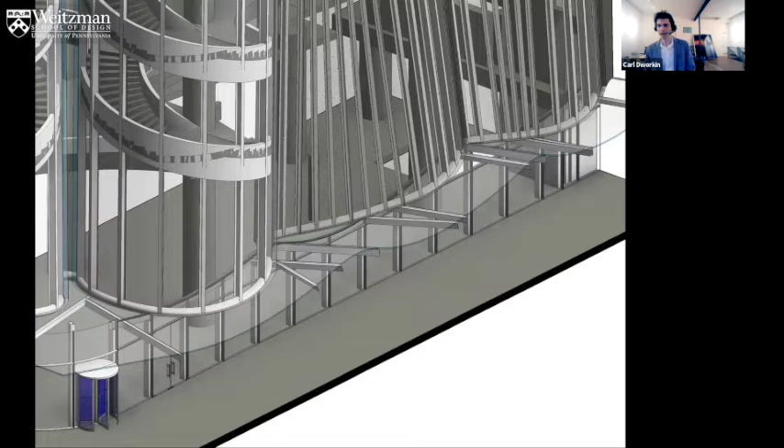Some are solid, some have windows migrating across them. And I'm going to run through this quickly so we can get to the end. We also tried to deal with the canopy. You can see this canopy has all these mullions; all the structure is kind of chaotic in this early diagram. And our goal was to align the canopy beams with the mullions to make that lift of the lobby apparent. And the canopy also has to be analyzed for drainage.

So while the canopy is scripted, it's also evaluating the slope at every point. And these are the geometric rules that we have to use to link cylinders to each other. I don't have a video in this one, but you can see it's important to have a negative cylinder on the bottom of each of the positive cylinders of the facade to avoid some ugly clipping. We didn't want this canopy to trim the bottom of the facade.

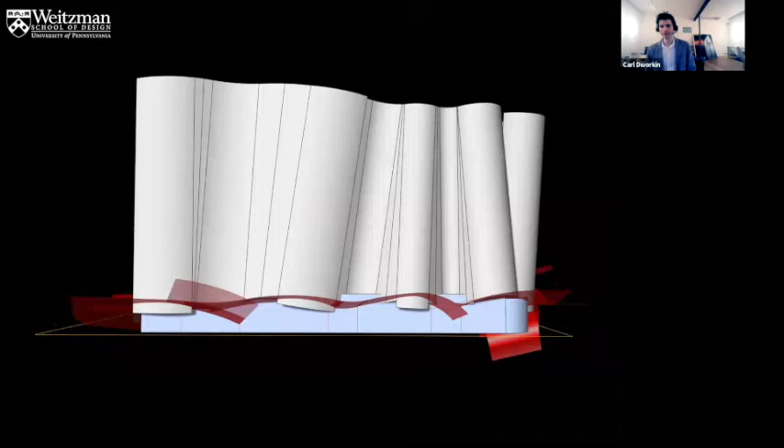And then we smoothed in the negatives together, and we produced this condition where all the mullions of the lower glass align with the structural beams of the canopy, like that. And then each of these panels has to be split so that they fit onto the size of glass that the manufacturer can produce. And sometimes we need extra divisions and we have to hide those over the gutters. And this is the drawing we send out for pricing that shows all the different panels flatly unrolled.

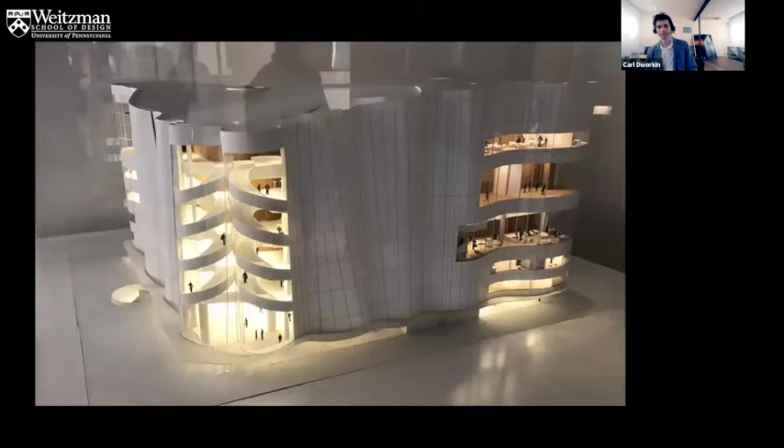And now you can see the design again now that you understand it. That's the back. You can see the windows migrating across the horizontals. And the canopy is actually a rigid shape with the facade, so that relationship between them helps limit the structure in the model, in the site. And then the interior is a whole other project, how to develop the theater. There's an interior view of the stairs. Another one.

So since we are at our time, we can go very quickly. So the form of the theater is controlled by the acoustics and the sight lines. And actually every single seat needs to be looked at, sometimes subjectively. And we also had to try a variety of ceiling forms. The shape is very contested because you need a lot of volume. And so sometimes a transparent ceiling is desirable, but not visually desirable. You need a lot of volume for the acoustics.

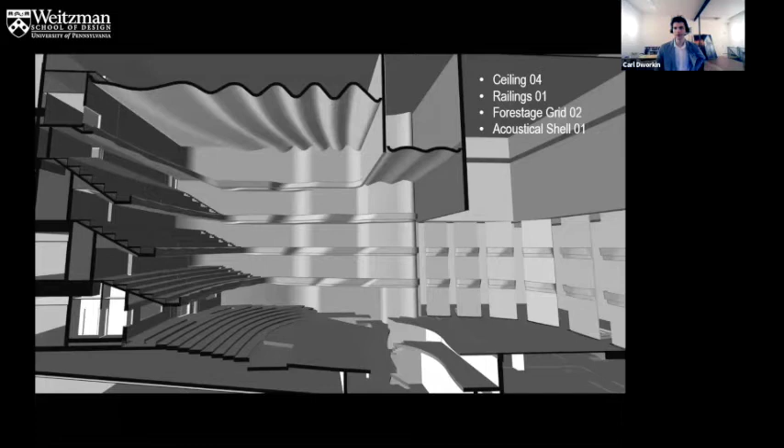And these ceilings have to absorb the catwalks, and the location of the openings is also controlled as part of that. So we tried multiple versions of these. These are actually scripted as well. The ceiling actually can't touch the edge of the interior of the room because there's a curtain that goes past it to transform the theater from opera into regular theater. And so we had to make these odd transitions at the edge of the room, which were a weird geometry, which we then replaced with approximated versions of trimmed cylinders to aid fabrication.

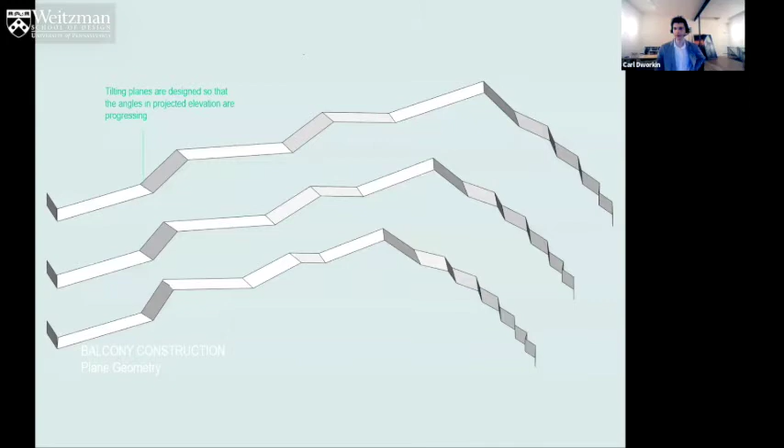And the balconies also rely on the same geometry as the facade, so they're planes that then are replaced with standardized cylinders. And they're trimmed at angles to preserve the sight lines. And we had to develop also the acoustical panels that can be stored, and that is the interior. So a very similar project to the facade, happening over again. So to conclude, I'm going to turn it back over to Scott.

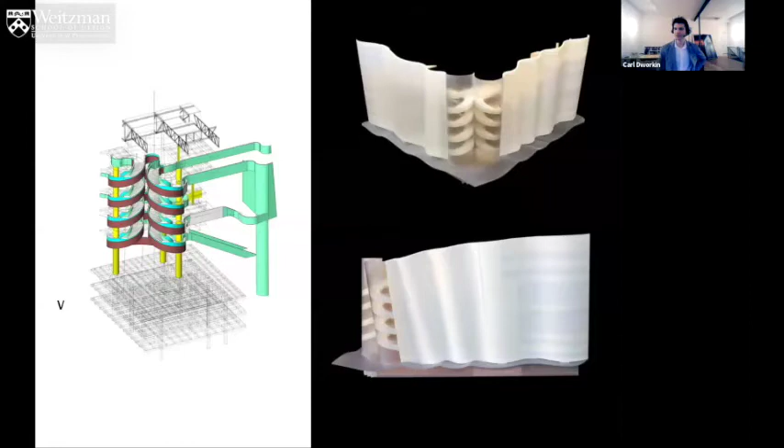Oh, well, we really only intended to make a brief comment about the activation of the experience of architecture, how a project actually proceeds into life. And the experience that we've had has been this museum in Israel. But I think the most exciting moment in this has been that the space that we had thought was a dynamic and exciting and activated geometry, which, by the way, was the first of that kind that we explored, turns out to be the site because of the curator of a very different project, the curator who came after the initial client.

The initial client, Moti Omer, unfortunately died. He was a wonderful client. Very tragically died right when it was finished. But a new curator came and really transformed the building. Go to the next slide, Carl, and you will see that artists were asked to intervene.

Some of the art I'm not showing you here has really altered it in unexpected ways, but the only point I wish to make was that I believe these kinds of spaces invite a different kind of response in certain kinds of cultural institutions. This is another dimension of this kind of work. They involve speculations and new types of activation of art and activity, potentially performance.

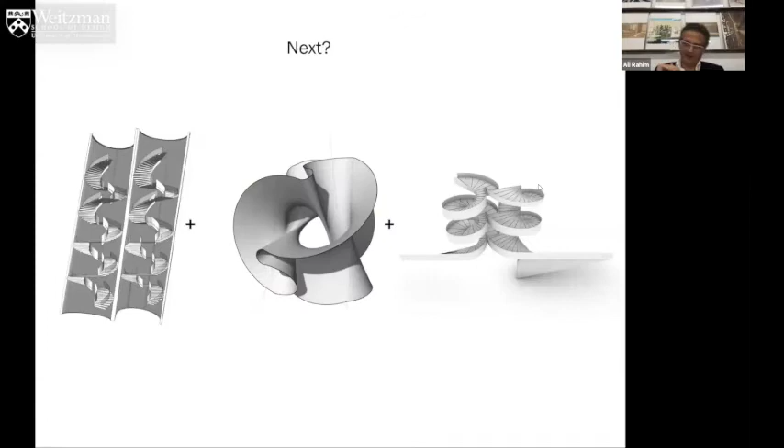And I think the breakthrough for me, and I said this in the introduction, but I want to re-articulate it, was Taiyuan. I really think the Taiyuan, and not only the hyperboloids and the circulation through them, but then the relationship of those to the structure and the tensegrity notion that you propelled in that project, has helped shape your entire work in different ways.

And I love seeing this, because this is a maniacal version where you are really exploring the different possibilities of this geometry, its relationship to one another, and then taking us through the entire process of what it takes to get these contested geometries built, right? And it needs the same level of expertise and precision and careful thought. And some of these moments of the stairs that you showed from the interior are just spectacular.

So I know you start with these geometries, but you always test them through the internalized movement and the atmospheres they create and the excitement of the spatiality, which you brought up right at the end as well with the Tel Aviv Museum.

So I really appreciated the talk, and it's so important for students to understand that this work has such rigor to it. You spoke of moments that were really tough to deal with that the client put forward, but also the solutions in such a restrained manner: restrained site, restrained poche, restrained geometry, restrained number of panels at the end, which were 8, I think, right? All of this develops this incredibly evocative project at the end.

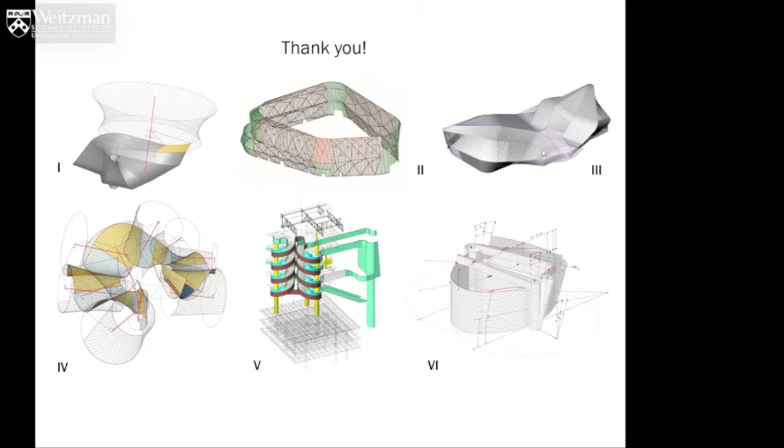Well, just to begin, we don't have very much interest in free form because we're interested in bringing these difficult geometries into contact with the orthogonal world of architecture. There is a tension between these things that are breaking free from the orthogonal and the orthogonal. But there's also a desire to make possible their rationalization so that they can be extruded, as we are doing with the cylinders, or made of flat parts. They have to enter into the world of construction.

Purely free forms are very indulgent and easy to make, but they don't allow this kind of communication with architecture and with the world of construction. The straight lines are essential. Those are the moments of truth. That's just where you bring it into relationship to the real world of architecture. Right. And your work has always been about geometry. Geometry is always about lines, right, and curves.

Tanisha asks a question. He says, Scott, it seems like you knew the hyperboloids wouldn't work. Why didn't you stop Carl from going further with his idea? Carl! I don't know how to answer that one. Remind me, because I love it happening.